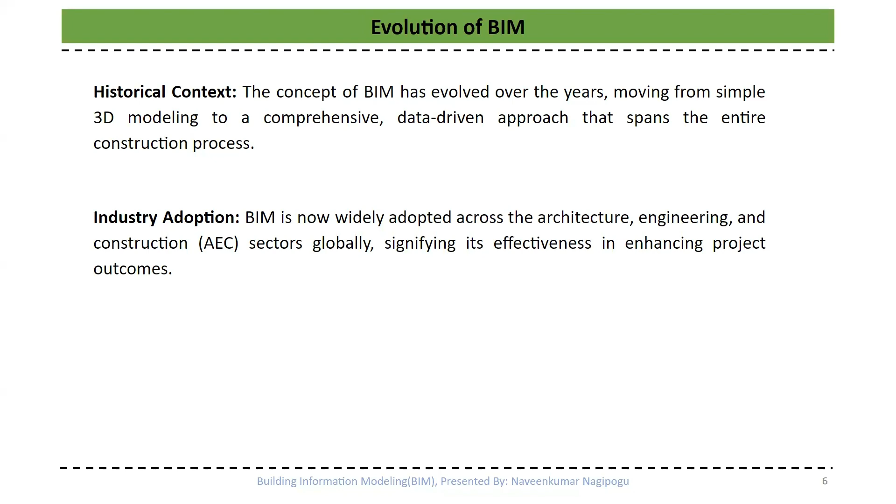When it comes to the key components of BIM, everyone will think about 3D modeling. Yes, but that is not the only part. There are so many parts, and 3D modeling is just one of them.

We can create intelligent 3D models for visual representations of the project, so that just by having the 2D plans, sections, elevations, and details, we will be able to develop 3D models using 3D modeling software. For example, Autodesk Revit is really very popular software in our industry. Maximum stakeholders, contractors, architects, and engineers are using that, so we also choose that software.

And collaboration. Imagine if you are working on a project and you want your group also to work on it. Is there a simple way that multiple people can work on a project at a time without clashing? Is that possible in traditional construction practices? No. But with the help of BIM software, we will be able to work on a single file with the help of many people.

And data management. When it comes to a construction project, right from the inception or planning stage, we will be creating and sharing multiple documents, whether at the stage of planning, design, construction execution, or operations. So many documents we create and share with multiple people.

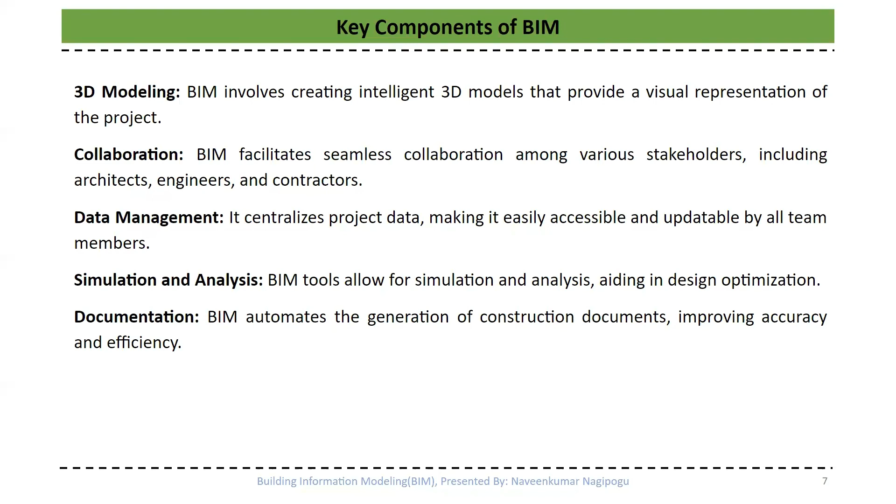For example, in Revit, say you are modeling a building. After you finish modeling, if you want to know the floor plan view, section view, or elevation view, everything gets generated automatically. And if you want to know how many doors, windows, or RCC columns your project includes, that can also be taken automatically with a few simple clicks. That is the beauty of it.

Going further, there is specific importance in the case of the architecture discipline. We know architects are designers. When it comes to a project, the client will first contact architectural people because they give the architectural design first. After that, the civil, mechanical, electrical, fire protection, and plumbing engineers will take that design and design their services according to the architectural plan.

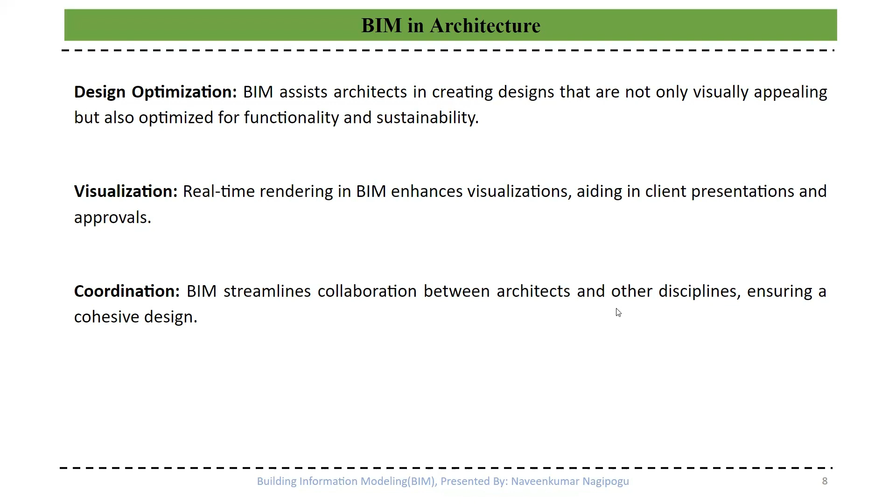Not just for design optimization and design, but also for visualization. There is so much difference between just showing our plan or design on paper versus in a 3D model software. With the help of BIM software, before executing or before hitting the ground, we will be able to show everything. And coordination is very important between people whenever there are multiple people involved. This BIM platform plays a very important role in that case too.

And when it comes to engineering, here come our people: civil, structural, mechanical, electrical, plumbing, energy analysis, and sustainability engineers. While architecture people develop the design and model in BIM software, likewise all these engineers will be able to develop the model and do analysis, so the client gets benefited and impressed, and then we get the project.

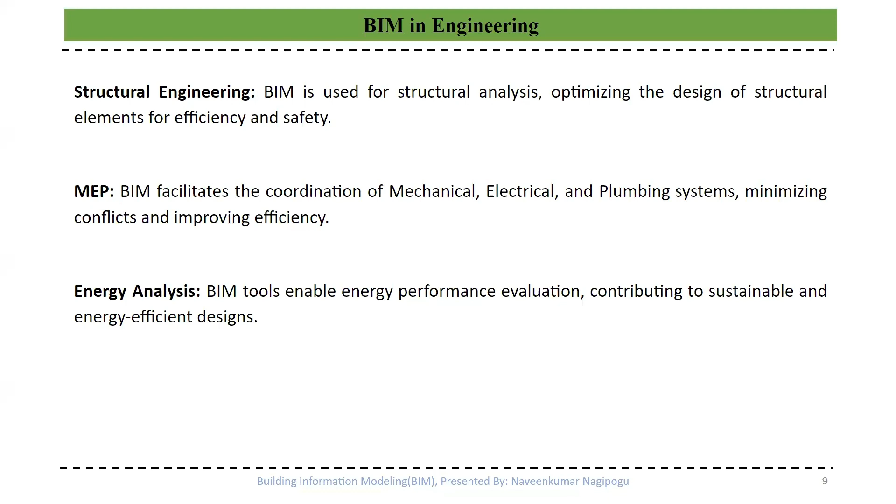When it comes to construction, we know how hectic our construction processes are. Construction projects are unique in terms of planning, cost estimation, site logistics, and execution.

We cannot follow the same process for all projects because they are unique. For example, when it comes to cost estimation, traditionally we receive architectural or other drawings from clients or consultants, then manually count how many doors there are, the surface area of the wall, the volume of concrete, how much cubic meter of concrete or square area of bricks. These kinds of things we do manually.

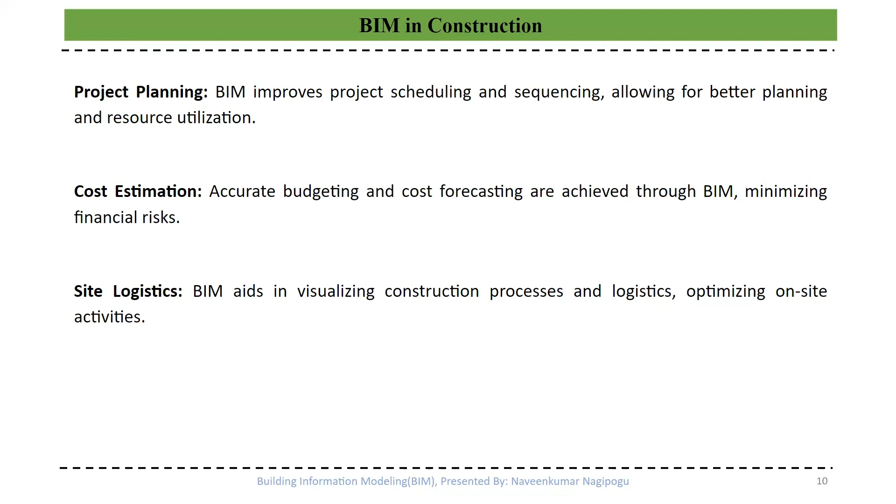But when it comes to BIM, the platform with the help of software, once we develop the model, we will automatically extract the quantity and cost of the building for each and every element - of a brick, of a concrete, of a beam, of a window, of a door, and many more things. Whatever element we include in the model, we get the cost. For that, we should have the data first. We will see that more in detail.

When it comes to facility management, what is this? We know after the planning, designing, and construction stage, people are going to live inside the buildings. They should get proper ventilation, proper heating, and air conditioning - without that we can't live. So that is called operation and facility management. BIM is not only limited to planning, design, and construction - it extends beyond these stages into facility management.

Say, for example, you have a big building and in one corner of the room there is a fan that is not functioning. How will you get to know about it? So, for example, you found it - yes, there is damage to the fan, we have to replace it. How will you know the specifications of that fan, and how much electricity it consumes each day, month, or year? How will you track your assets - how many assets are in your building, how they are functioning, and where they are? What about service maintenance - you bought a fridge or an AHU, how is it performing? Can we make modifications for better performance? All these things can be checked using BIM software.

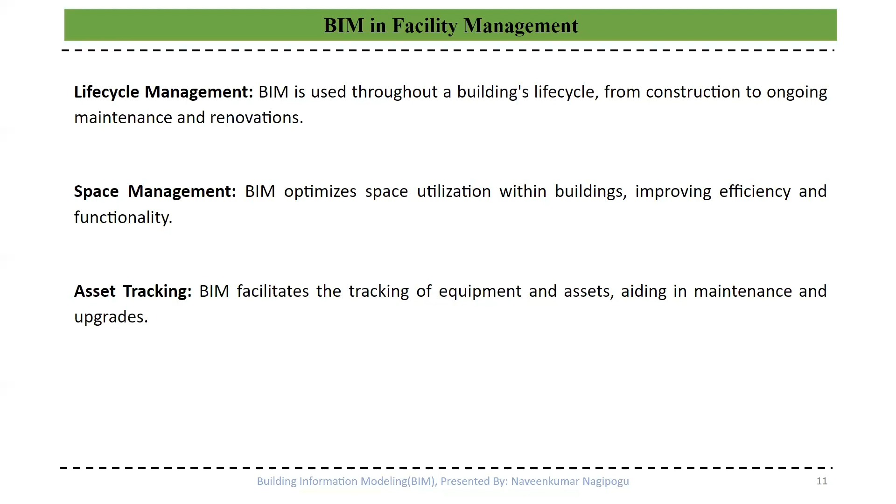Now let's come to our core part - career opportunities in building information modeling. So far, the main intention of what I've explained is that the boundary of BIM is not limited - we can go beyond and above. It is not only limited to civil guys, meaning civil, architectural, interior, structural - no, this is not only limited to them. We can go far and beyond, like electrical, mechanical, plumbing, and fire protection engineers, etc.

Let's see what are the roles and responsibilities of people working in BIM areas. First, we have a head, the BIM manager - his role will be looking like this, responsible for the project from start to end. Then we have the BIM coordinator. Actually this is a hierarchy - we are coming from the top. You will see more roles and responsibilities of the people.

Then we have a BIM modeler - yes, this is our specific interest, BIM modeler. The person who wants to pursue their career in building information modeling, their role will start with the BIM modeler. We create 3D models of buildings, infrastructure projects, bridges, or whatever built asset. We receive either PDF drawings or CAD drawings, import those into our BIM software or Revit software, then by understanding the 2D documents or drawings, we develop a 3D model. Yes, this is our first step after getting a job in a BIM company as a BIM modeler and BIM analyst.

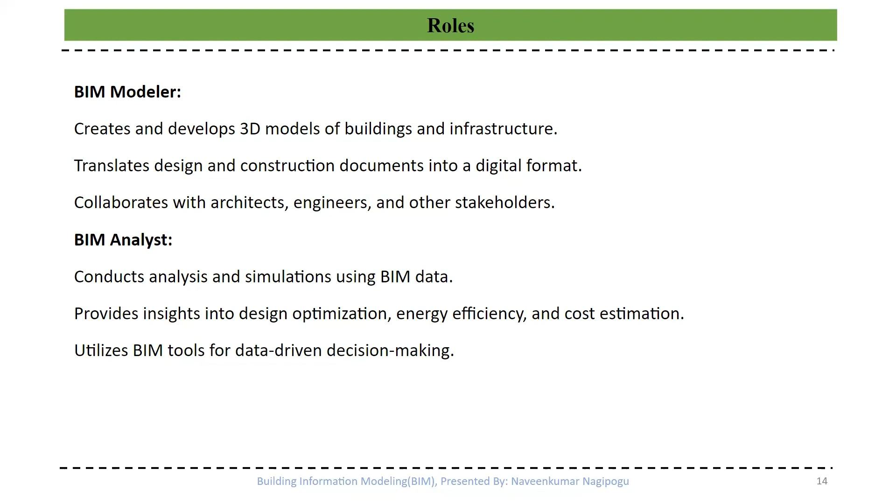This is one more role for people working in BIM - these people can provide insights into design optimization, energy efficiency, cost estimation, and all. Moving further, we have BIM Technician - these people also assist in creation and maintenance of BIM models. And BIM Specialist - after getting some exposure and experience, say for example my background is civil engineering, I joined a company as a BIM modeler, started learning Revit, and now I am satisfied with my expertise in the civil field.

Yes, I can model the building or bridge now, whatever it is. Now it is time to start understanding how other discipline people are working. We have to understand their practices and specifications also, so that communication and coordination will be easy. Then we will get a role as a BIM specialist.

It means interdisciplinary exposure. I am not only limited to civil or architectural, but also having knowledge of some mechanical things, electrical things, so that I can lead a project. He will be standing as a BIM specialist, coordinating with multiple people.

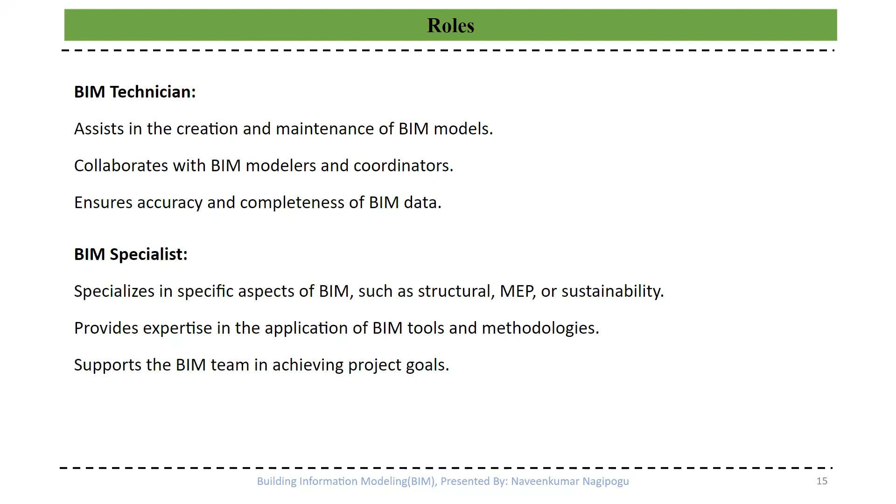Then BIM Architect. The people who have a degree in architecture can simply jump into the BIM Architect position. Similarly, they will be having responsibilities like developing a 3D model of their architectural design and sharing it with the stakeholders.

Then BIM Engineer. When it comes to the design part, we know there is a huge difference between BIM modeling and BIM designing. So far in the industry, I have been seeing so many modelers. People are learning the Revit software and jumping into the industry, and they are starting modeling. Yes, that comes under the part of BIM modeler.

Now, when it comes to BIM engineer, suppose you understood the meaning of modeler and designer. In the industry, the designer will give the drawings and the design intent, then the modeler will take the drawings and develop the model. Both are having equal importance. So it is our wish, either we want to become a BIM design engineer or a BIM modeler.

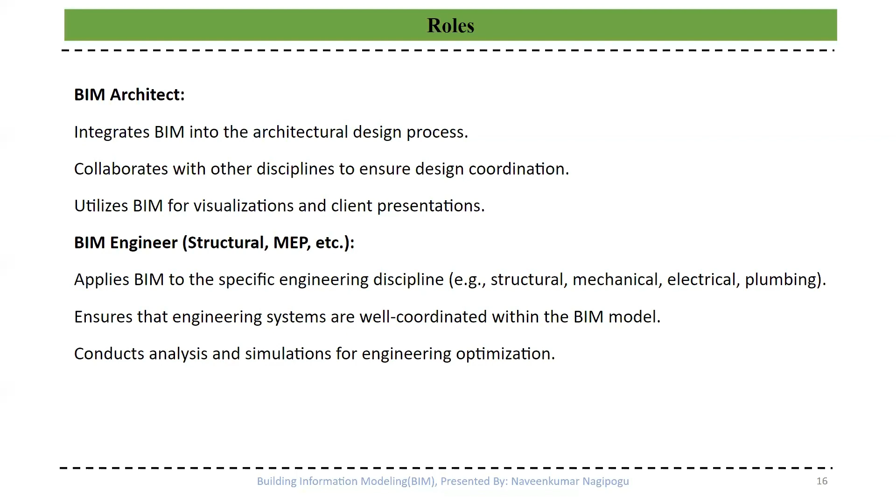Then when it comes to the BIM project manager inside the organization, the same person will be handling the projects.

Then when it comes to BIM researcher, suppose you find a very huge interest in BIM and don't want to work in a company but want to conduct research on that, yes, you can go ahead. There are so many companies which give you BIM researcher positions, and there are so many higher education opportunities for you. You can go into the research field, and the minimum qualifications will be ranging from MTech in engineering to PhD for these positions if you want to go into research field.

This is so far about the BIM roles and responsibilities of the people. Then here comes the BIM educator or trainer. The beauty of the civil engineering area is that we can stand on our own feet and we can live.

Say, for example, you are going to pursue a career in the BIM field. Obviously, you are going to learn some software, right? You not only need to get a job in a company, you can work as a freelancer. Say, first start from small projects, act as a freelancer. You develop the 3D models, produce the drawings, done.

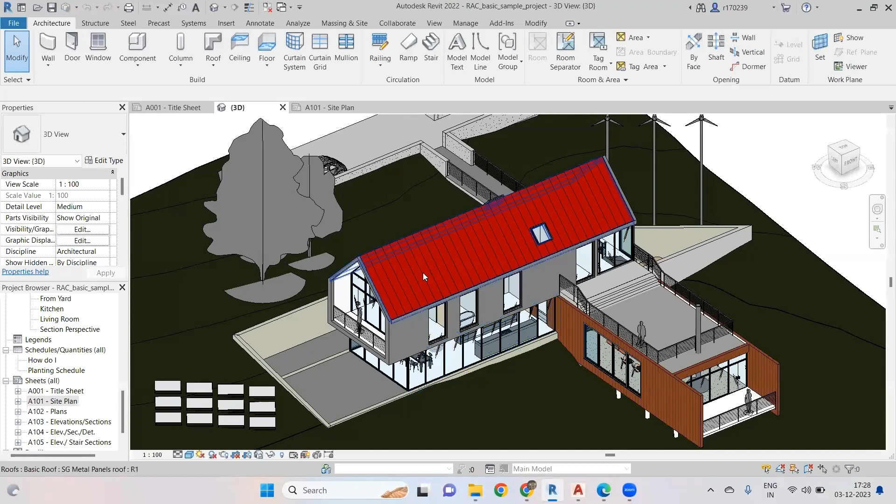I hope my screen is visible to you. I just opened the Revit software. Is it visible to you? Can anyone confirm? Yes, thank you.

See, this is the user interface of Revit. When we say Revit, it is not only Revit architecture or structure. I hope you're following my cursor. Here is an architecture tab, structure tab, steel tab, precast systems. In these systems we can find a lot of things related to MEP. But in our course, our interest will be on Revit architecture. You see wall, door, windows, components, columns, roof, ceiling, floor, curtain systems, curtain grid and mullions, railings, staircases, room and area development plans. We are going to work with each and every command present here.

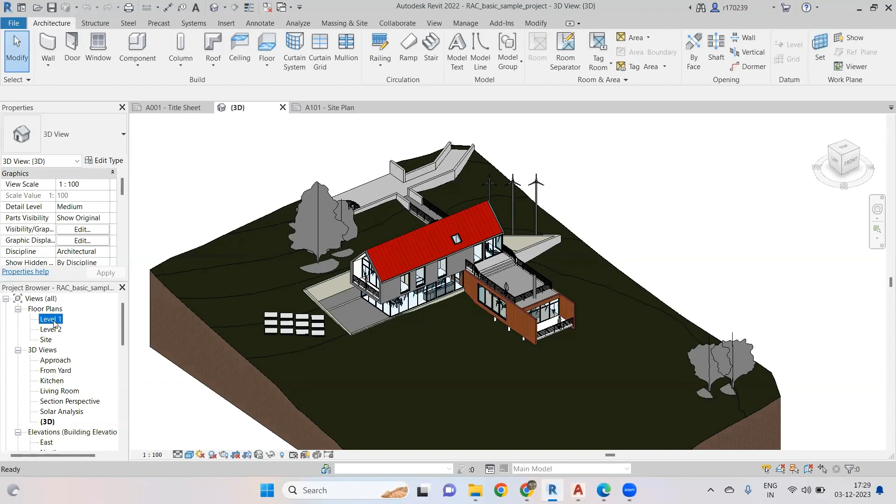Let me show you, for example, let me open another view. This is a sample project developed by Autodesk, and we will be learning more about it and we'll be able to develop each and everything. For example, how to model a building, how to model the landscape, etc. I can say this is a simple software - we can learn it very easily with proper guidance and a mentor.

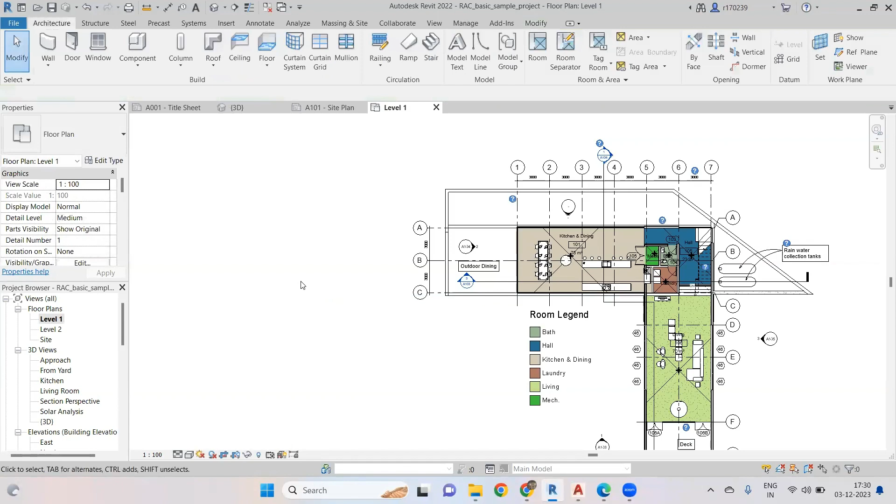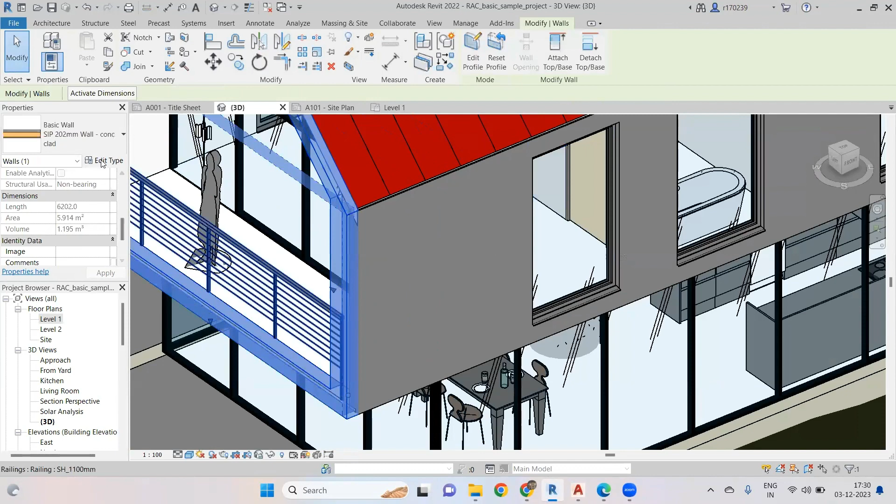Whatever you see here, this is all parts of the Revit software. Now I clicked on a single window. When we go about it, we can see what is the size of the window, the height, the width. And when it comes to the basic wall, this is the wall actually we're using in this project. When we go to structure, we can see the layers of that wall - it includes concrete, wood, and so many other structural layers, including timber and finishes, the paint, and whatnot.

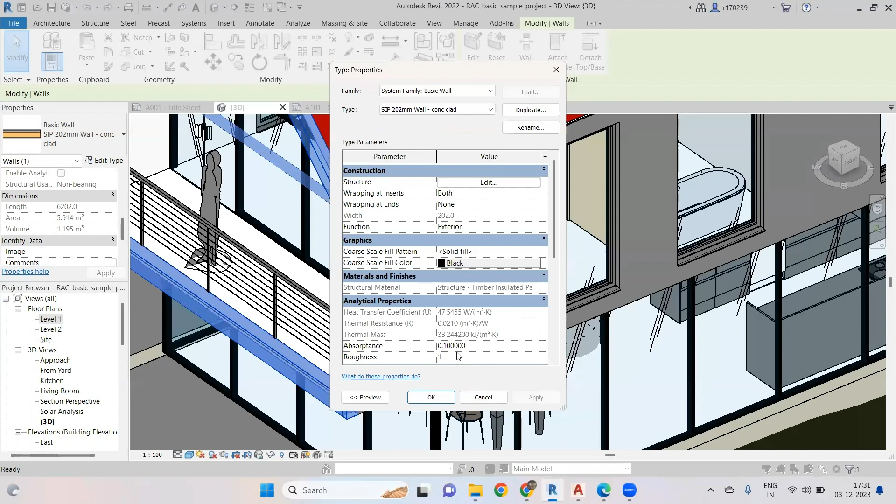This is the ultimate BIM software, I can say. We can put inside the project whatever we want and whatever is needed. You can model the roads, you can model the bridges, you can model the trees, you can model the land. And let me show you the magic.

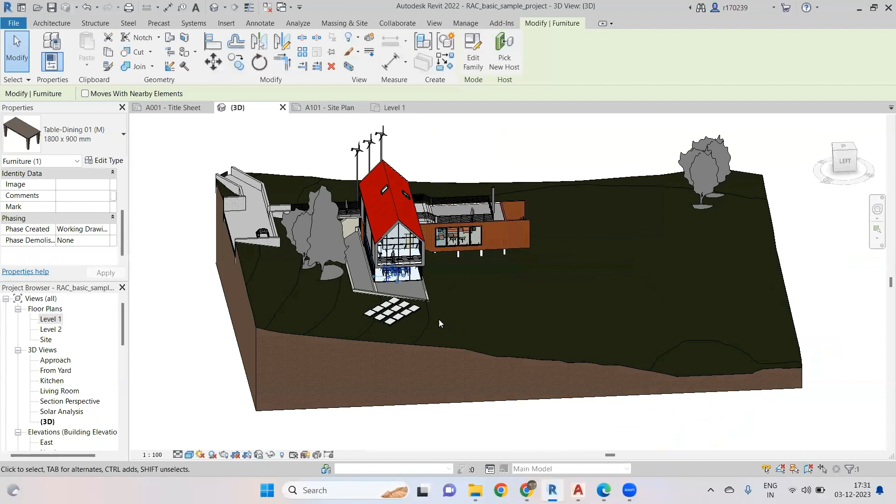See, first we started developing the 3D model and we did it. Now we want floor plans, sections or elevations. How to get it? See here, already we have it - I will show you. I hope you're following my cursor. For example, I'm going to the sheets area.

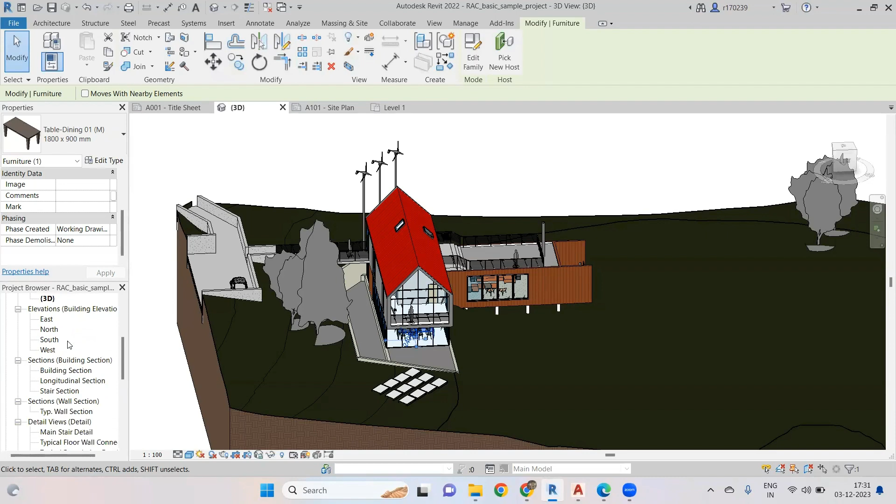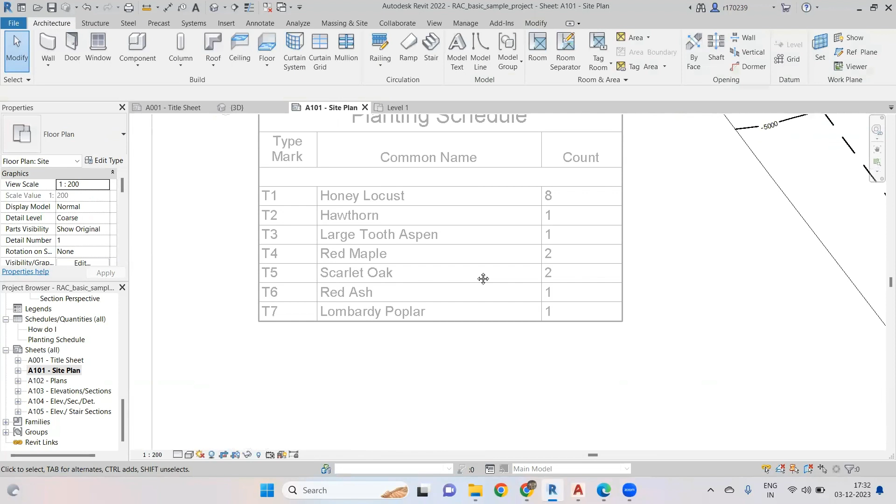Say for example, this is one of the drawing sheets we produced using the software, and we'll be able to give more and more information and tags also - what this is about and how it is. And it is a schedule of the plants - how many number of plants are there, and which type of plants.

And when it comes to the floor plans, you see this is level 1 - it means ground floor. Yes, it is the ground floor, and we can see what else is there in the ground floor. It is a room legend - bathroom is there, hall is there, kitchen, dining, laundry, living, and mechanical room.

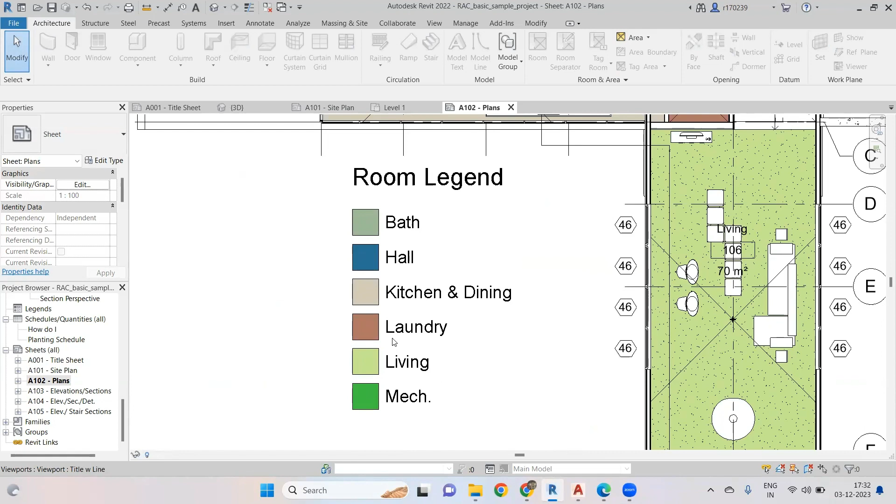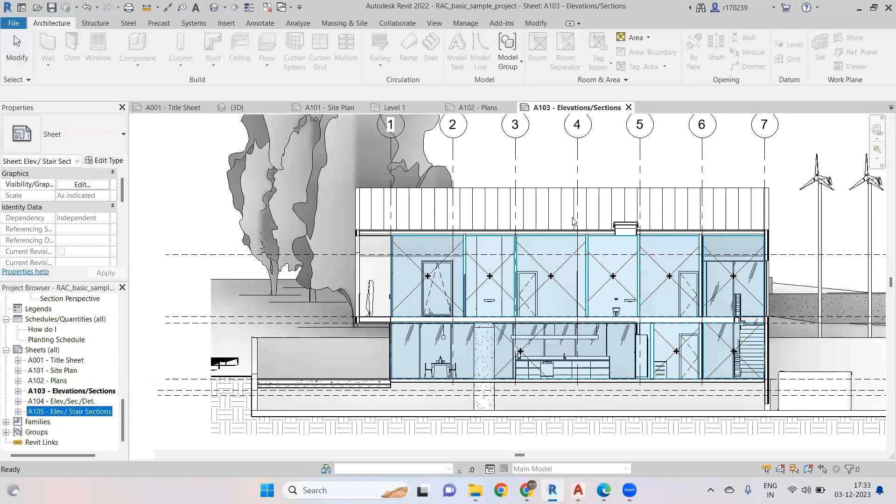Everything we can extract from the BIM software, that is Revit. And when it comes to the stair sections, inside of this software, we can see the stair section, at what level the staircase is starting and until what level this is ending.

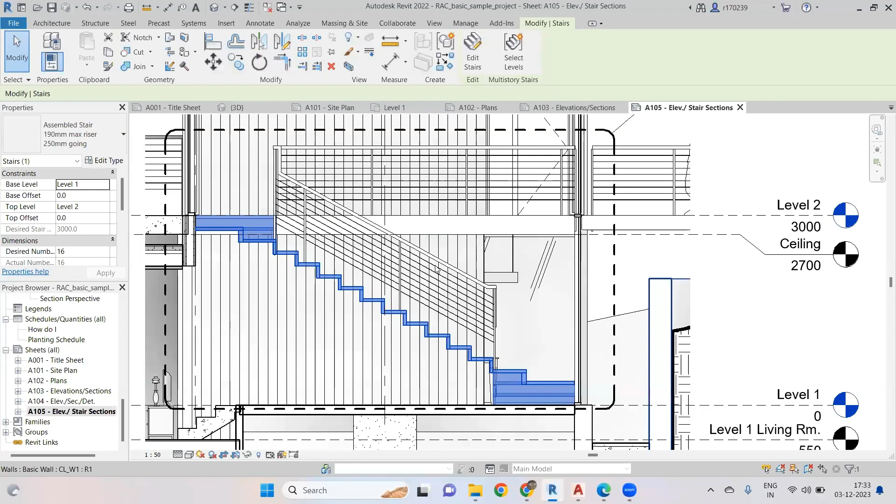You know, the beauty of the software is you do one change at one place, it will be replicating at each and every space. I will show you that right now itself. I am taking a 3D view of it.

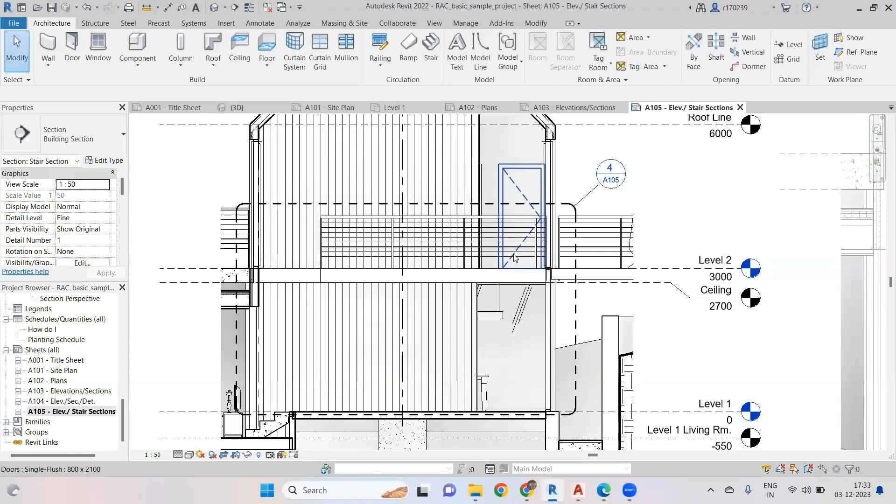Say for example, here is the staircase. Now I selected it and I am deleting it. Yes, I deleted. Now let's go to our elevation, stair section. Where is the stair? It's gone, right? That is the beauty of the 3D modeling software, especially this Revit.

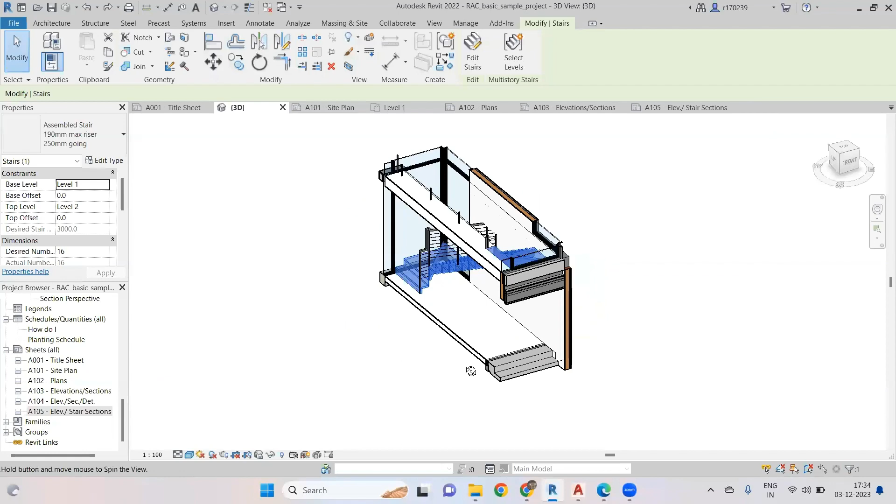Now let's go back and do Control Z. Our staircase came back. Let's go here. Yes, our staircase is here. Not only this, there are many and many functionalities of Revit. We can do wonders. We can plan things and we can execute things just by having the 2D plans.

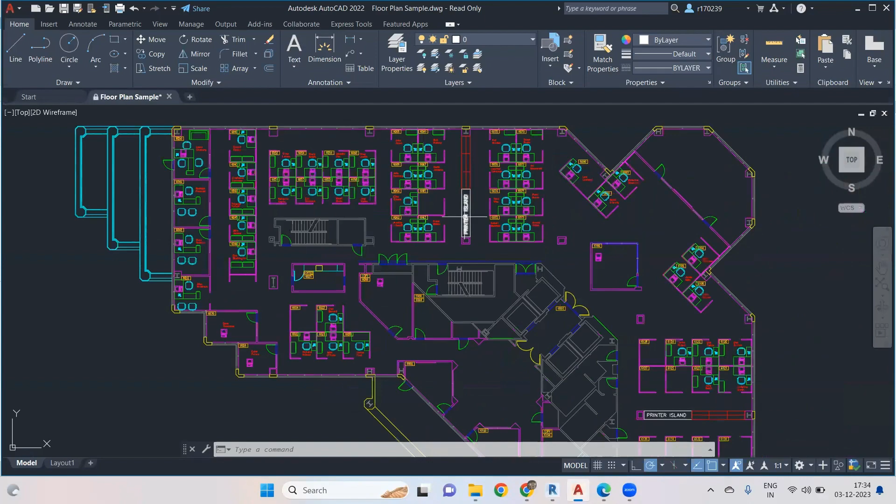For example, I hope you are able to see my AutoCAD screen. This is a floor plan. Just by having these kind of floor plans, we can develop the 3D models, and we will be able to show the models looking like this. Let me switch it to full view. Yes, like this. Beautiful 3D models, which can be used for the implementation on the site.

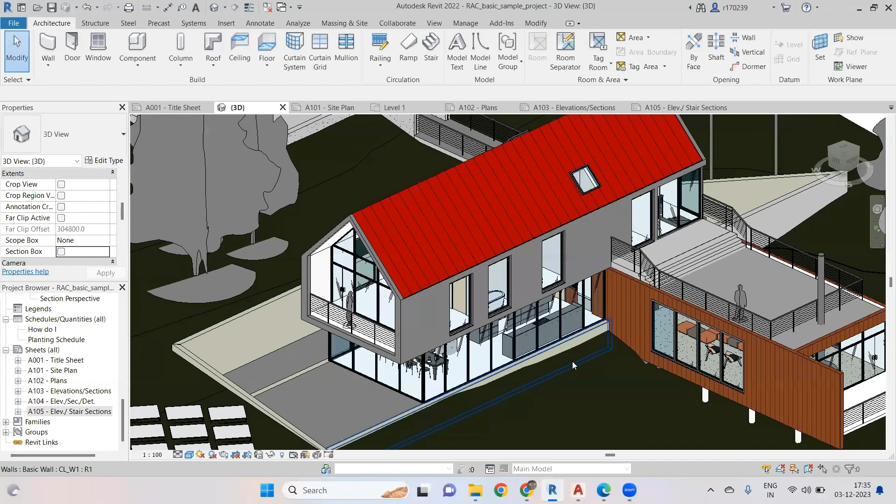And it is not only limited to the software. We can execute this using augmented reality, virtual reality for immersive experience. Of course, that is actually an advanced topic, but it is really worth knowing about. Not only homes, we can build, we can model anything we want. I hope this is making sense to you and you are getting an idea of what you will be able to learn.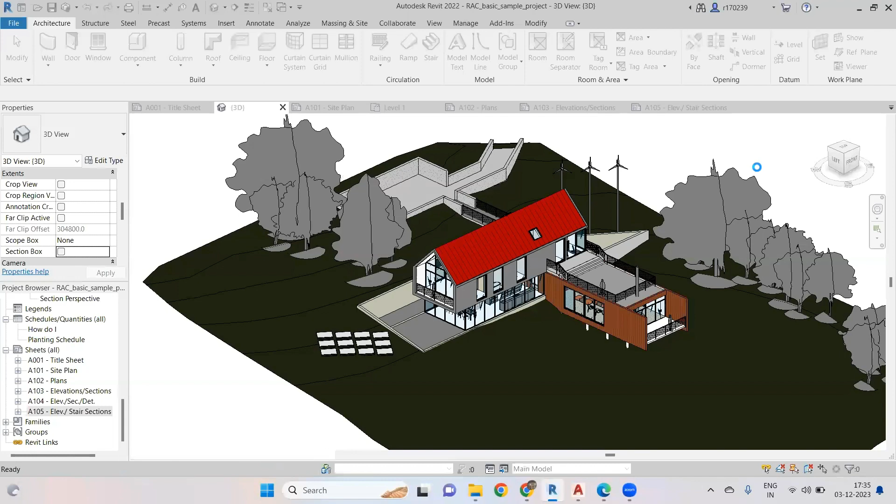From the scratch, we will be able to learn how to work with Revit. For example, I want to create a new project. How to create a new project? Now I am going to explain this user interface again. This is a fresh user interface. Nothing is here. Then if you want to start building a project, we can. I can say yes, it is simple software. We can learn it very easily.

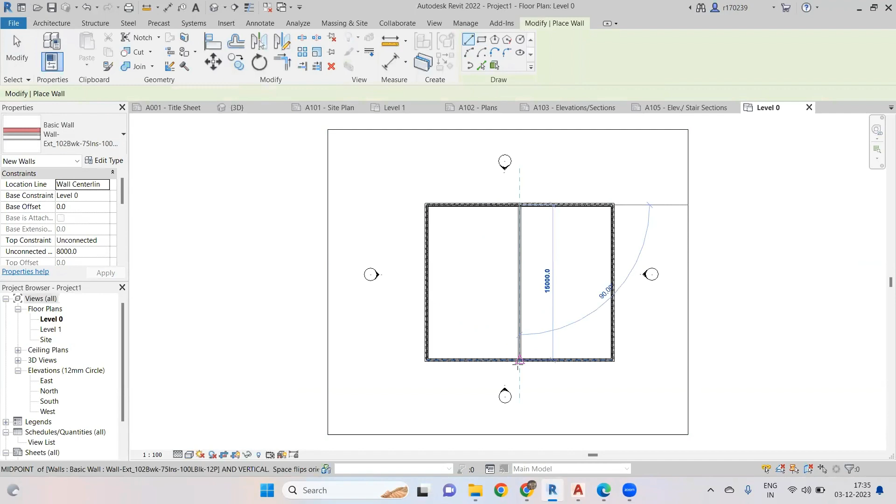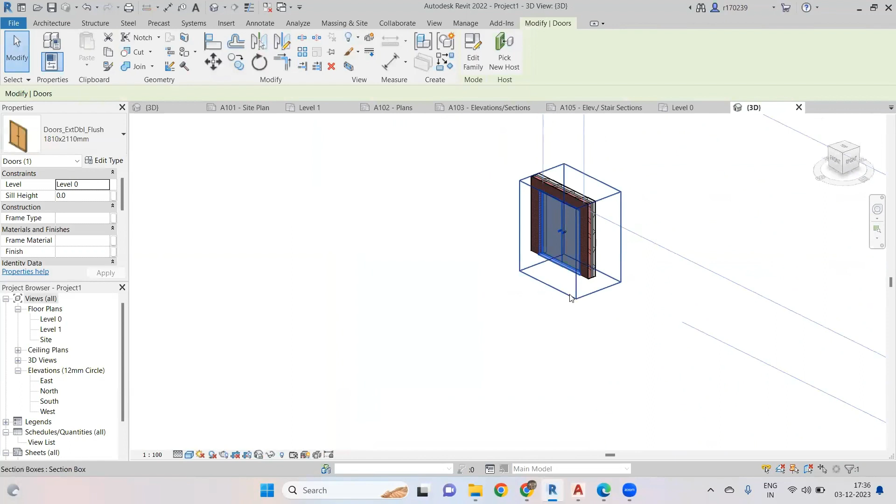Then, simple as it is, let's pick a door and place a door here. Let's pick a window and place a window. If you want to see this in 3D, how it is getting developed, let's go to 3D. Let's zoom in. Yes, this is the door which is equipped. Let's extend this. Yes, this is the door and this is the wall and this is the window we placed actually.

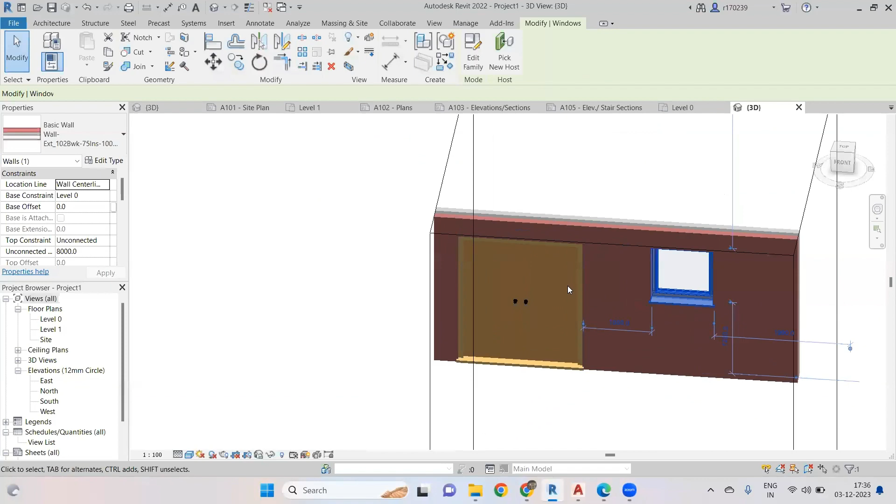And we are not only limited to these available door families. We can switch to whatever you want. Let me make it a single door now. Yes, it is a single door now. And if we want to load some more families from the internet, yes, we can do that. Let me show you. Let's go to the insert tab and load a family.

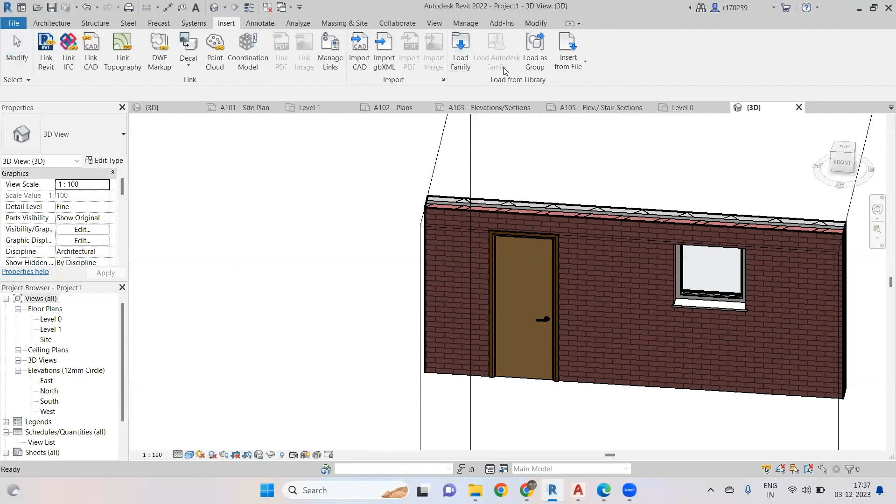Let's go back and load Autodesk family. Yes, load Autodesk family. Here you can search for the families whatever you want. For example, we want to import a table. Let's search for the table.

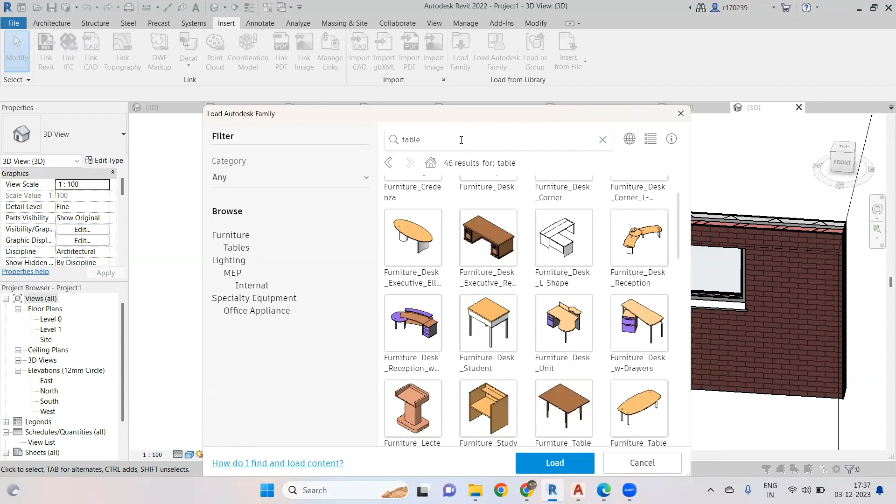Yes, we got tables, and it is your wish what kind of table you want into your project. Now let's search for a chair. Yes, these are all the number of chairs and types of chairs available in the Autodesk family. See, furniture table, dining table, what not. Say for example, plumbing fixtures, we want a water closet into our project. Let's search for the water closet. Yes, what kind of water closet you want? You can drag it into the project and use it.

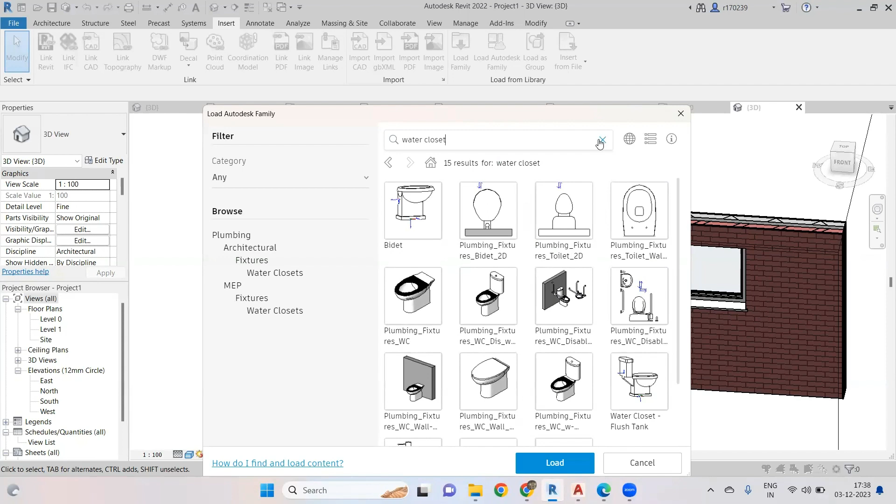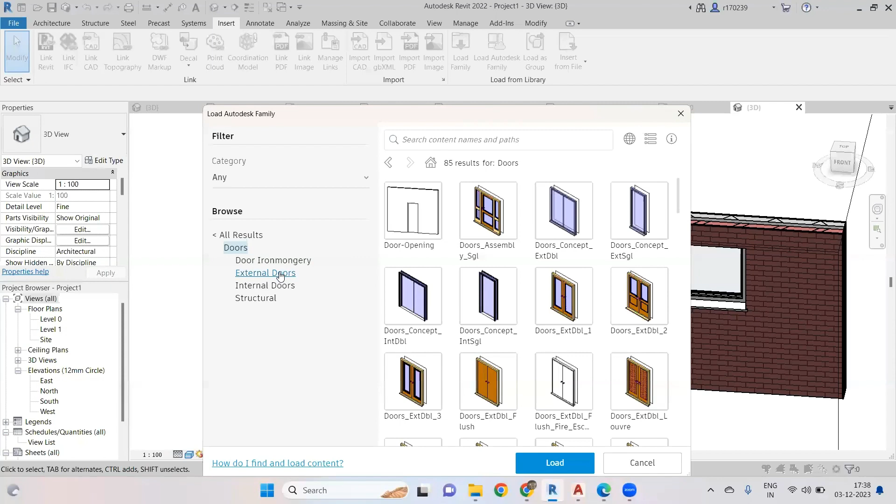We can do amazing work with Revit, I'm damn sure on that. And what else do you need? You can see here there are so many types of families here. You want duct, door - say I clicked on the door. Now you can see how many types of doors are available. You want external doors or internal doors, what kind of doors you want.

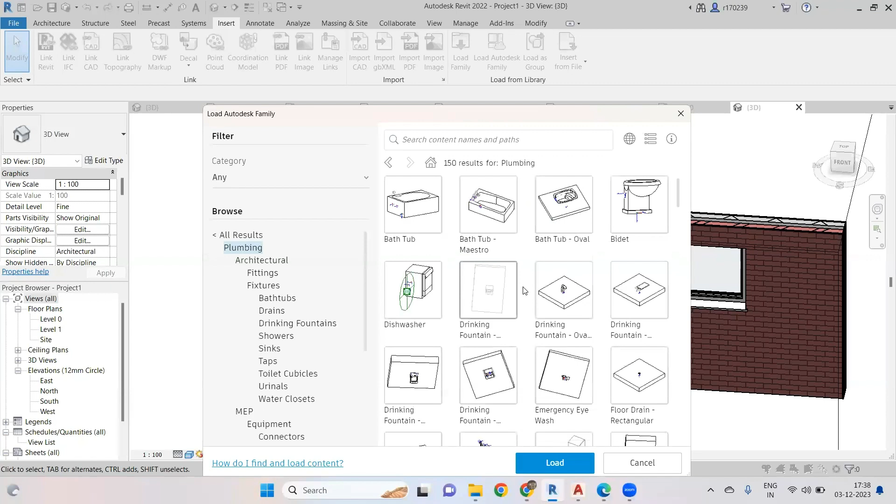When it comes to pipes, you can load the pipes whatever you want, wherever you want. Then structural framing, the steel sections, and the plumbing fixtures - whatever plumbing fixtures you want, the drains, sinks, water closets, water basins and sinks, many and many. Like this, everything will be available inside the Revit environment.

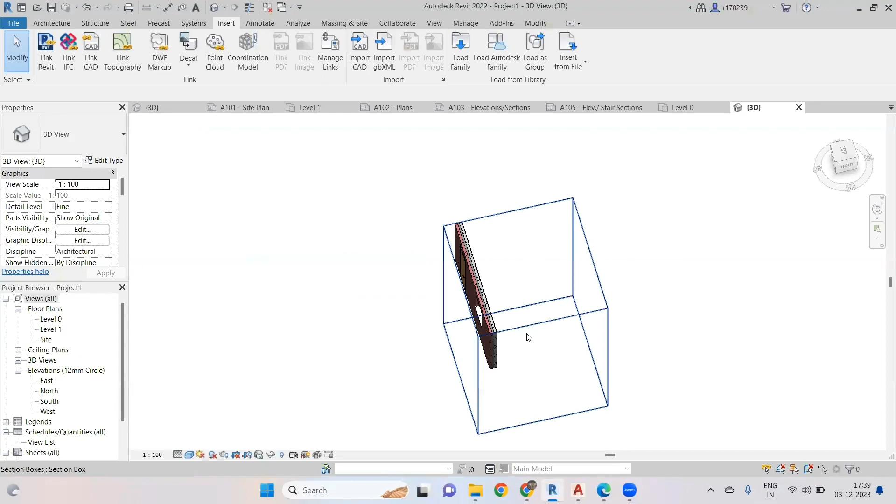If we don't have it, then we can download the families from third party sites also. For example, I hope you are able to see my screen - I am typing BIM object. The BIM object is a platform to download Revit families. We can browse for more families here, and we can download and use them. This is one of the platforms. Yeah, these are all kinds of things we can do by using our BIM software, that is Revit.

I hope you are getting an idea what we are going to do in our future live online course, that is BIM and Revit architecture. Let me show you what I mentioned actually in the brochure.

I particularly and personally designed this course from the scratch. The person who is not a civil engineer also can attend and will get to know all about it. Yeah, from that stage I developed this course - right from the meaning of what is architecture, what is engineering, construction and operations industry, and the industry sectors, construction stages and whatnot.

And what is the fundamentals of CAD and BIM? How it started? What is the real meaning of CAD? What is the real meaning of BIM? And how our mindset should be to jump into the BIM field? And what are the standards, the principles, and the common terminologies in BIM? Everything, the content I prepared.

And when it comes to BIM tools and software, there is not only one, there are many, right? What would be beneficial for us, what we can learn, and what we should learn. And when it comes to advanced topics, not only just for BIM planning, design, and construction - what about sustainable design and energy analysis, cost estimation, facility management and prefabrication, and integration of AR and VR, whatnot?